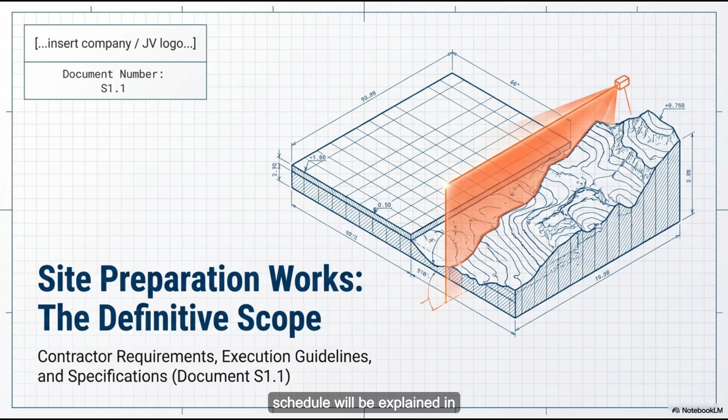You know the scene. You are walking down the street, maybe coffee in hand, and you pass one of those massive chain link fences, completely covered in that green privacy mesh. You peer through a gap in the mesh, and what do you actually see? Usually just a giant, muddy, seemingly empty lot. Maybe a couple of idle bulldozers just sitting in the dirt. And you probably think it is just empty space, waiting for the real work to begin.

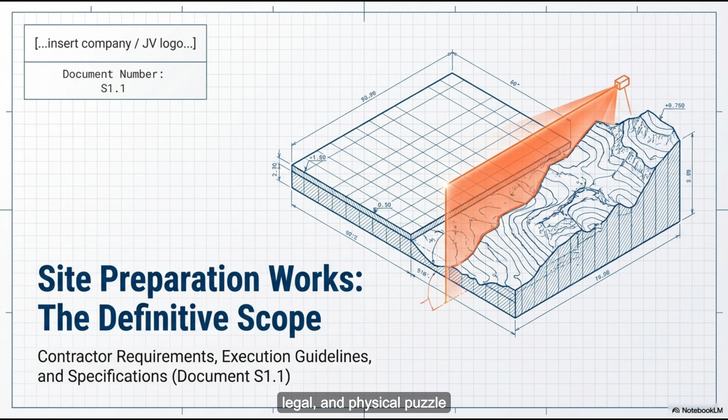Which is what pretty much everyone thinks. But you would be entirely wrong. So wrong, because that muddy lot is actually a highly engineered, legally binding, and mathematically precise blank canvas. It is governed by a ruthless set of rules. Absolutely ruthless. Today, we are unpacking the massive, high-stakes legal and physical puzzle that happens before a single brick is ever laid on a major infrastructure project. It is a massive undertaking.

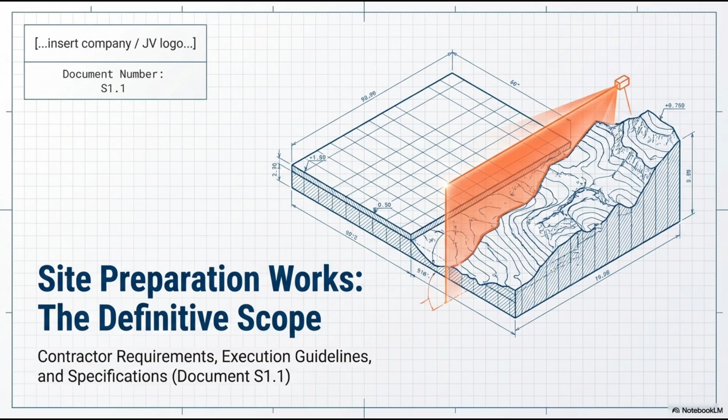We are doing a deep dive into document number S1.1, the Site Preparation Works specification of a FIDIC Red Book construction contract. For anyone who doesn't spend their weekends buried in international construction law, the FIDIC Red Book is basically the global gold standard for complex construction contracts. The ultimate rule book.

It dictates exactly who is responsible for what, and critically, who absorbs the financial blow when things inevitably go wrong.

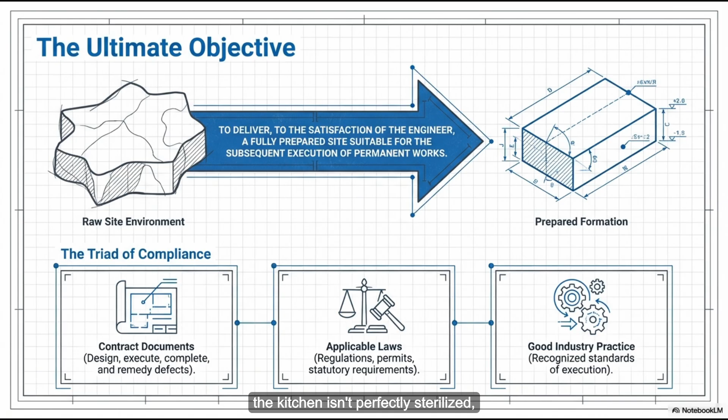To give you a sense of the stakes here, think about prepping for a massive dinner service at a Michelin star restaurant. Because if the kitchen isn't perfectly sterilized, if the ingredients aren't verified down to the gram, and if the prep cooks haven't executed their jobs flawlessly, the actual cooking is going to be a disaster. You cannot execute a culinary masterpiece in a contaminated, disorganized kitchen. The permanent works of the meal rely entirely on the invisible work done hours before the first order is even fired.

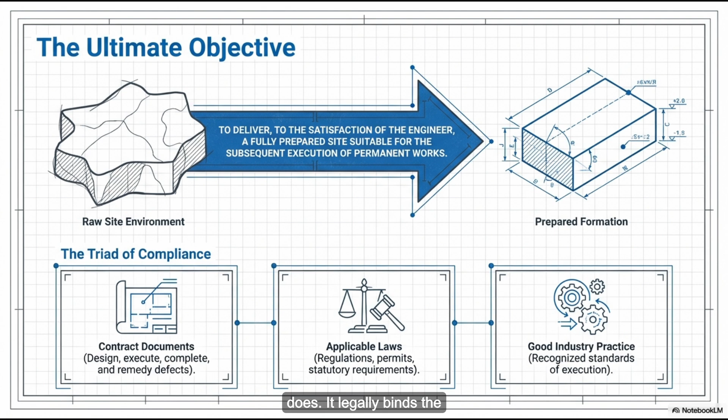That captures the essence of document S1.1 perfectly. The stated objective is to deliver a fully prepared site suitable for the subsequent execution of the permanent works. The engineer acts as the employer's representative, overseeing the administration. But Section 2 of this specification lays down a staggering mandate. It legally binds the contractor to provide all labor, materials, equipment, and temporary works. But it goes so much further than just supplying tools and people.

Because Section 2 contains what I can only really describe as a legal trapdoor, a very expensive trap. It's a catch-all clause. It literally states that any work, services, or items not expressly described in the contract documents, but which are necessary for the completion of the works, must be executed by the contractor without any additional cost to the employer. It is the exact kind of clause that forces project managers to double and triple check their insurance policies. The employer is essentially transferring the dire risk of the unknown directly onto the contractor's shoulders.

It feels like buying an all-inclusive vacation, and right as you're packing your bags, the travel agent casually mentions, oh, by the way, if we forgot to put your return flight on the itinerary, it is your responsibility to book it and pay for it yourself. Enjoy the beach. That is exactly how it feels. So I am trying to picture how a contractor practically prepares for unknown unknowns when they are bidding tens of millions of dollars on a project. How do you price a ghost? Well, you price it by being intensely proactive, and that is the exact behavior this contract is designed to force.

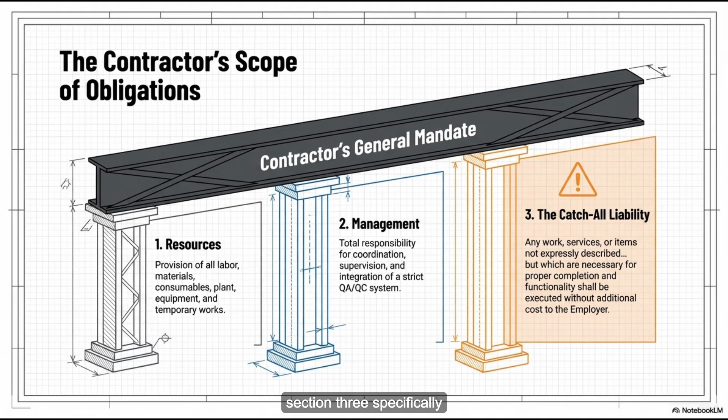The employer's logic is basically, we are paying for your expertise, not just your manual labor. So Section 3 specifically mandates the contractor must scrutinize all documents upon receipt, immediately. They are legally obligated to notify the engineer of any errors, omissions, or ambiguities before they even start up a single bulldozer. They have to rely on what the contract calls recognized good industry practice.

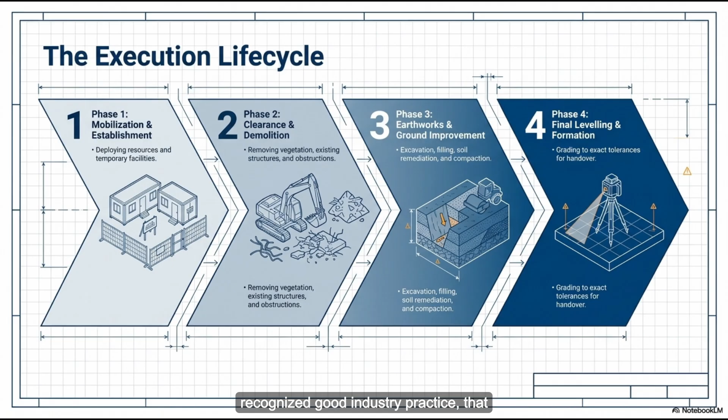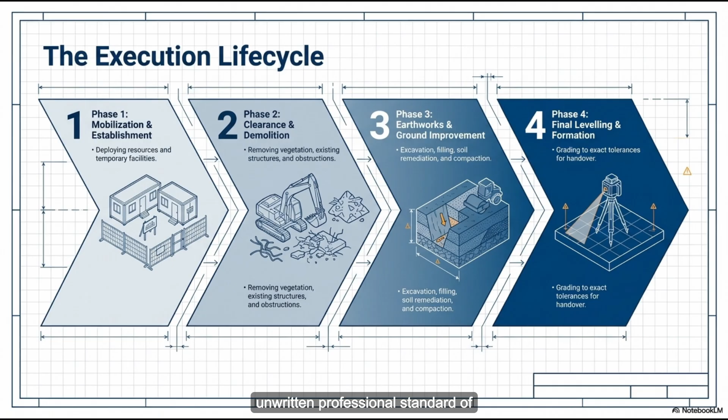So if they are required to use recognized good industry practice, that implies the contract isn't just binding them to the literal words on the page. It's binding them to the entire unwritten professional standard of their field. They can't just act as mindless order takers and say, well, I just built what you drew.

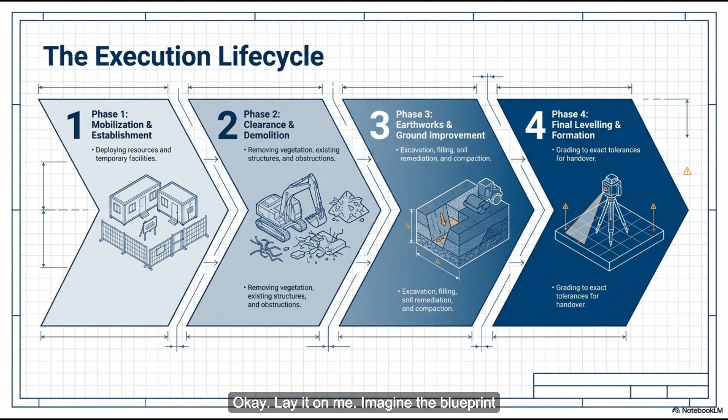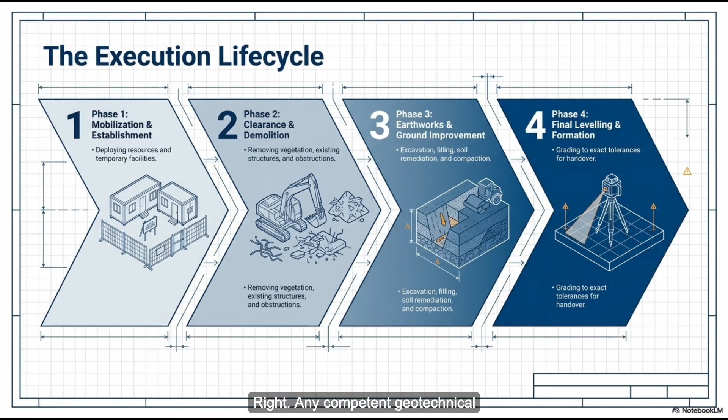Far from it. Let's look at a hypothetical disaster to illustrate that. Imagine the blueprint for the site preparation is missing a crucial retaining wall near a steep incline. Any competent geotechnical engineer looking at that site would know a retaining wall is necessary to prevent a mudslide. So it's obvious to a professional.

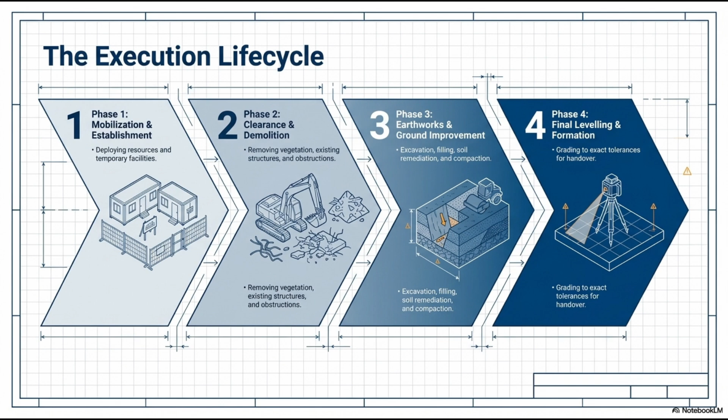Exactly. Now, if the contractor fails to catch that omission during their mandatory review and they just clear the site according to the flawed drawing and a mudslide occurs, the catch-all clause kicks in. The contractor pays for the cleanup, and they pay to build the retaining wall entirely out of their own pocket.

That is just wild. Given that massive financial sword of Damocles hanging over them, the contractor basically cannot afford to trust the existing site environment at all, not even a little bit. They have to take absolute physical control from day one, which explains the sheer scale of Section 4, the mobilization and site clearance.

Mobilization, outlined in Section 4.1, is a monumental logistical hurdle. It isn't just dropping a portable toilet and a trailer on an empty lot, which is what I always pictured, honestly. Most people do, but they actually have to establish a temporary, fully functioning mini-city.

We're talking about negotiating with municipal grids to tap into power and water, setting up high-bandwidth telecommunications, installing specialized sanitation facilities, building temporary access roads that can handle the weight of heavy machinery, and securing a labyrinth of permits just to legally exist on that piece of land. So they are essentially building a temporary infrastructure network just to support the people who are going to build the permanent infrastructure network. That is exactly what it is.

And once they finally have their mini-city up and running, Sections 4.2 and 4.3 get into the physical clearing and demolition - the tearing down part. Ripping up existing vegetation, tearing down old structures, safely capping and disconnecting old, potentially dangerous utilities like live gas mains or high voltage lines. It is highly hazardous work.

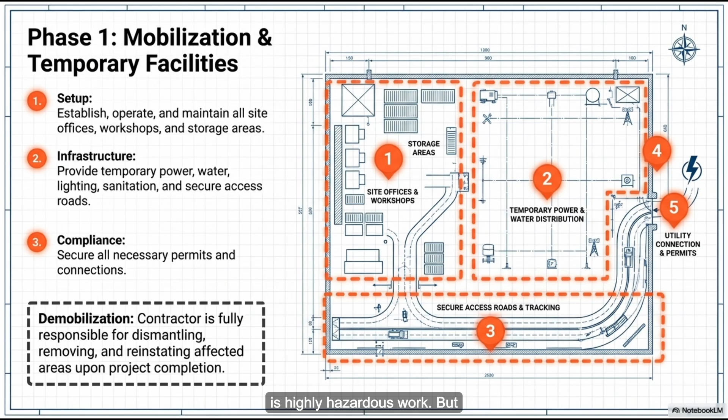But then we hit Section 4.5, which covers ground improvement, and this is where the reality of the dirt itself comes into play. Ground improvement is often the most volatile phase of the entire operation. The contractor is entirely responsible for identifying and excavating unsuitable or contaminated soils.

I have to pause on this because when I read the specifics of Sections 4.5.3 and 4.5.4 regarding environmental protection, I was genuinely surprised. I always assumed that if a crew dug up a pocket of toxic soil, say heavy metals from an old factory, or hydrocarbons from a forgotten gas station, they'd just load it into a lined dump truck, drive it to a specialized hazardous waste landfill, and that was the end of it. Out of sight, out of mind.

Right, but this specification heavily emphasizes treating the soil on site. They can't just truck it out. They actually have to wash or stabilize the dirt right there on the lot. Trucking it out is often the absolute last resort, and understanding why requires looking at the broader environmental calculus.

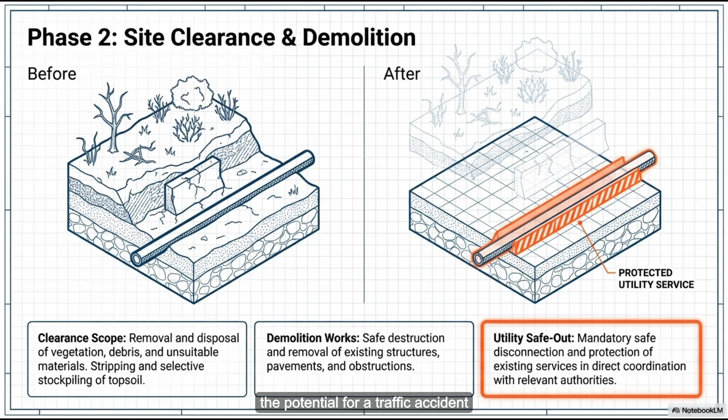Simply loading contaminated soil into a fleet of dump trucks and driving it across a populated city introduces a massive, unacceptable level of risk. You have toxic dust blowing off the truck beds, the potential for a traffic accident spilling hazardous waste into a residential neighborhood or a storm drain. You are taking a localized contamination problem and risking turning it into a regional ecological disaster.

Exactly. So the contract deliberately boxes them in. It demands they solve the chemical problem within the physical boundaries of the site. The contract insists on strict environmental protection measures to prevent cross-contamination. They have to aggressively control dust, mitigate odors, and manage runoff and leachate - leachate being the contaminated water that drains out of the soil when it rains.

Precisely. Section 4.5.4 details the treatment and remediation protocols. This can be in situ, meaning treating the soil deep underground right where it lies, or ex situ, which means excavating it but treating it elsewhere on the exact same site.

The document explicitly mentions soil washing. I was really trying to picture the mechanics of that. How do you wash dirt? Are we talking about giant washing machines for gravel?

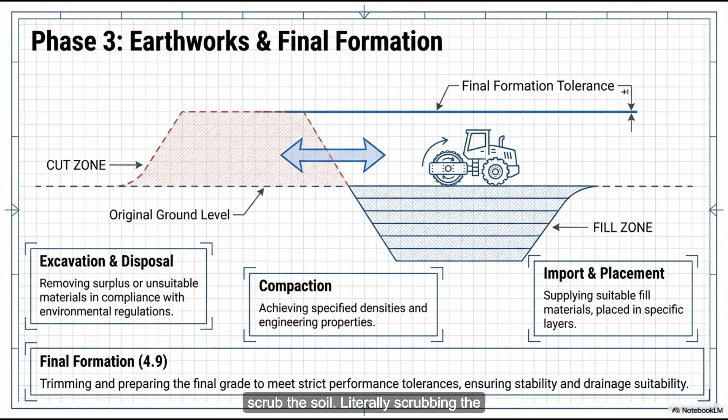Conceptually, yeah. Actually, soil washing is an intense mechanical and chemical process. Picture a massive industrial sorting facility temporarily erected right there on the lot. They feed the contaminated excavated dirt into large trommels, rotating cylindrical screens using high-pressure water jets and chemical surfactants to scrub the soil. Literally scrubbing the dirt. The goal is to separate the fine, heavily contaminated clay and silt particles from the larger, clean gravel and sand.

Oh, because the toxins cling to the finer particles? Exactly. So the clean aggregate can be reused on site, and only the concentrated, highly toxic fine sludge has to be carefully disposed of. That is wild. They are operating a heavy-duty chemical decontamination plant before they have even poured a single ounce of concrete for the foundation. And if washing isn't viable, they might use soil stabilization. How does that work?

This involves deploying massive augers to drill deep into the contaminated earth, injecting and mixing binding agents like cement or specialized polymers directly into the soil. Oh, so it hardens. Right. This chemically locks the toxins into a solid matrix so they cannot physically leach into the groundwater. And strict environmental permits dictate the movement, testing, and handling of every single grain of that soil.

Because, circling back to that catch-all clause we talked about, if they excavate contaminated dirt, fail to cover it properly, and a heavy rainstorm washes toxic runoff into the local municipal water supply, the Environmental Protection Agency shuts the billion-dollar project down immediately. And the contractor is entirely liable for the delay and the fines. The liability is absolute. Which means all this effort, washing soil, stabilizing toxins, moving thousands of tons of dirt, is...

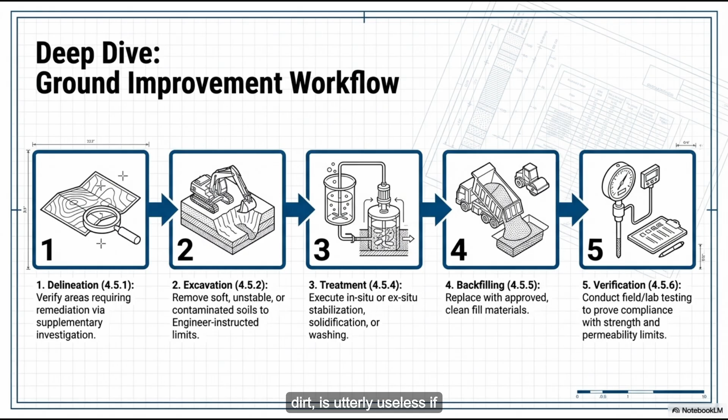Utterly useless if it isn't done to exact geometric specifications. Yeah, it has to be perfect. Which brings us to the invisible mathematical framework that governs this entire operation. Let's look at sections 5 through 7.

Sure. Section 5 covers survey and setting out. This is the critical translation phase, where the two-dimensional blueprint is mapped onto the three-dimensional physical reality of the Earth. The employer, or the engineer, provides the initial reference points and base coordinates. But crucially, the contractor must independently verify all of that survey data before they do anything.

I love this detail because it's yet another trapdoor of strict liability. The contract explicitly states that any errors in setting out the site must be rectified entirely at the contractor's cost. Completely at their cost. It reminds me of a bespoke tailor making you a suit. If the tailor measures your inseam wrong because they used a faulty tape measure that you handed them, but they didn't bother to verify your tape measure against a standard ruler first, they still have to buy the ruined fabric and make you a new suit out of their own pocket.

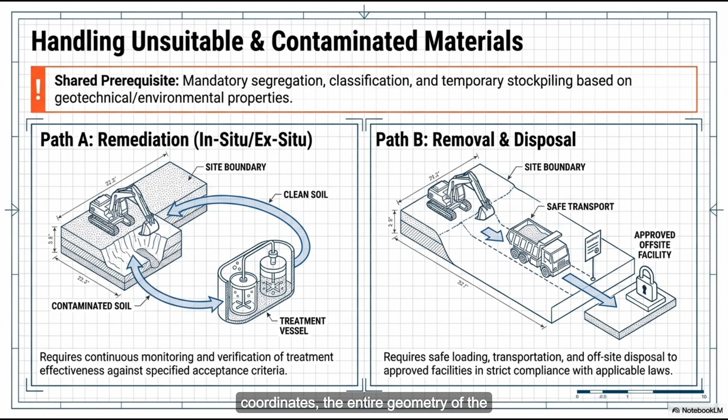Yes. It's wild to think about. It's a brutal reality, but it's the core philosophy of a FIDIC contract. If you build the foundational retaining wall 2 inches to the left because you didn't double-check the employer's coordinates, the entire geometry of the skyscraper going on top of it will be fundamentally compromised. Everything is thrown off. Exactly. The contractor is paid specifically to be the expert verifier.

But mathematical precision is only one pillar of this framework. Section 6 dictates health, safety, security, and environment, the HSE protocols. Oh yes, the contractor has to implement RAMS, which stands for Risk Assessments and Method Statements. I've actually seen RAMS mentioned in engineering circles. It's essentially a highly detailed document that says, here is the inherently dangerous thing we're about to do today, and here is exactly, step by step, how we are going to do it without anyone getting killed or injured.

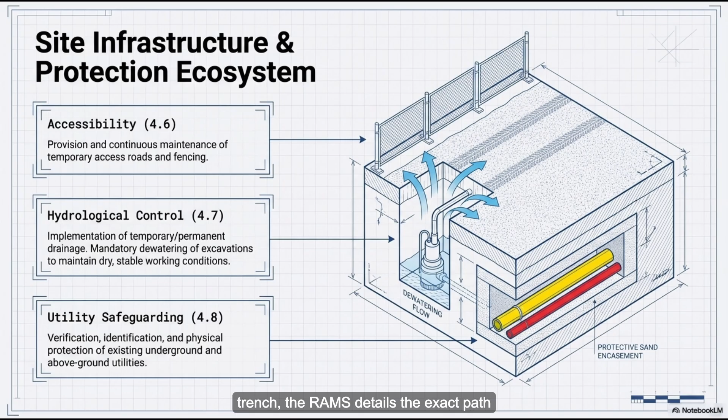Yes, and it is granular to the extreme. A RAMS document isn't just a generic safety poster on the wall saying, wear your hard hat. If they're moving a single piece of heavy machinery near a trench, the RAMS details the exact path of the machine, the spotters required, the soil-bearing capacity near the edge of the trench, and the emergency response procedure if the trench collapses.

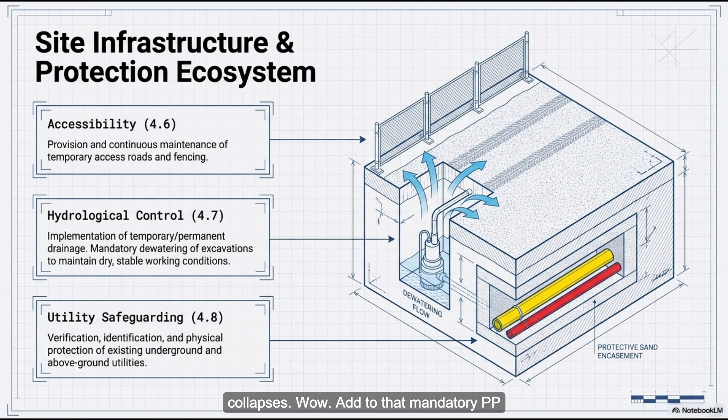Add to that mandatory PPE usage and strict access control with fencing and security gates. And this extreme level of control feeds directly into Section 7, coordination.

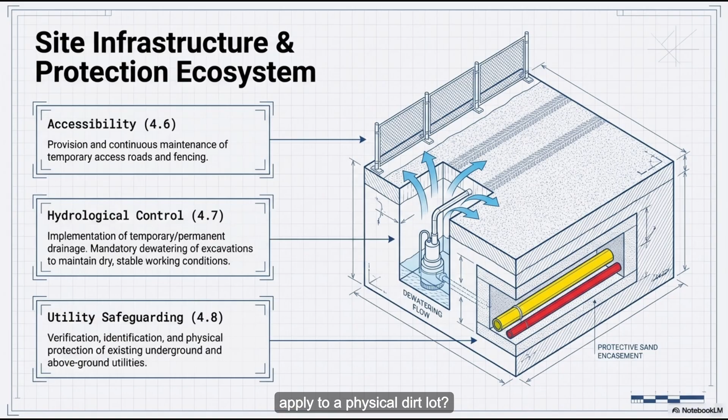The contract refers to this as interface management. In software, that's how two different programs talk to each other. How does that apply to a physical dirt lot? Well, in construction, an interface is the physical or scheduling boundary where different teams, different scopes of work, or different contractors collide. Think of the contractor managing site preparation not as a symphony conductor, which implies a peaceful artistic flow, but rather as an air traffic controller at a one-runway airport where all the planes are made of concrete, steel, and heavy machinery.

If one concrete truck misses its scheduling window, it blocks the steel delivery, which delays the crane operator, which costs tens of thousands of dollars an hour. They have to coordinate with the engineer, the employer, and entirely separate contractors hired for other phases of the project, managing geographical and temporal boundaries to avoid disrupting adjacent works, existing city operations, and third parties, like the general public walking right outside that green privacy mesh.

Exactly. The site must be geographically flawless, chemically neutral, and strictly secure so the next wave of workers can step in seamlessly. So the dirt is clean, the math is perfectly verified, the site is locked down, and the air traffic control of heavy machinery is flowing smoothly.

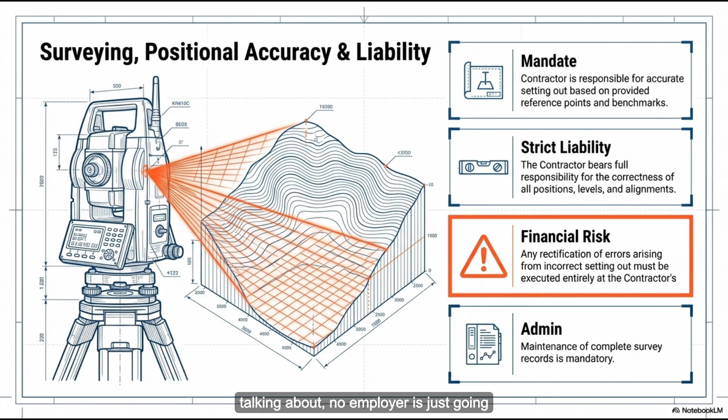Yes. But because of the immense crushing legal liability we've been talking about, no employer is just going to walk onto the lot, nod, and take the contractor's word for it. Absolutely not. They need immutable proof, which introduces what sounds like the most tedious part of the entire specification: Section 8, the completion and handover documentation. The paperwork mountain at this stage is absolutely staggering.

The physical work might be finished, but you have to legally prove you delivered what was promised. The contractor must verify the soil compaction, slope stability, and drainage performance through rigorous field and laboratory testing. They're doing things like Proctor compaction tests, taking physical core samples of the earth to a lab, just to prove the soil density meets the mathematical requirement to bear the weight of a high-rise. Exactly. They aren't just saying we rolled over it a bunch of times with a heavy machine and it looks flat. They are providing certified physics data.

And they have to submit what are called as-built drawings, meaning here is a schematic of what we actually built in the ground, as opposed to what the original blueprint hoped we would build. Because the earth is dynamic, things always shift slightly from the original design. You hit a boulder, you route a pipe slightly differently. The employer needs the final, true map.

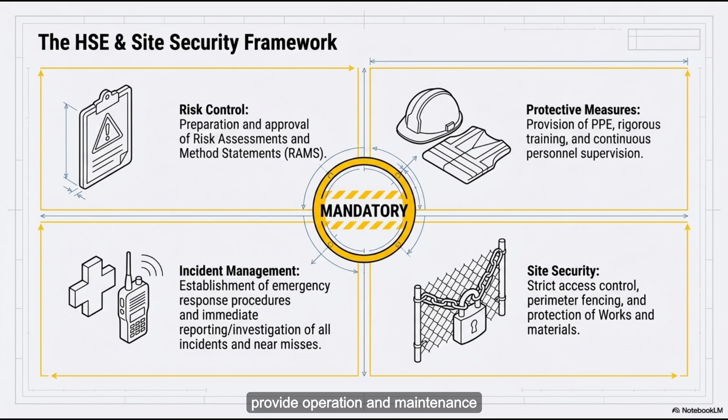That makes total sense. But here is an element of Section 8 that often catches people off guard. The contractor must also provide operation and maintenance manuals, O&M manuals, for any installed systems. Okay, this is where my brain stalled out reading the spec. O&M manuals for site preparation?

Yeah. I completely understand needing an operation manual for a complex HVAC system in a finished hospital or a high-speed elevator bank. But what on earth needs an operation manual in what is, at the end of the day, a highly prepped dirt lot? I get it.

It sounds weird. Yeah, it requires a shift in how you view the site. When we hear site prep, we imagine a dormant, flat patch of land. Right, but a highly prepped site is actually a living, active machine.

It often includes complex temporary or even permanent drainage networks that require specific maintenance to prevent erosion. It might feature deep dewatering pumps running 24 hours a day to keep the natural water table artificially depressed, so the next contractor can pour a deep concrete foundation without it immediately flooding. So if nobody maintains those pumps according to the manual, the pumps fail, the water table rises overnight, and the newly excavated foundation turns into a swamp.

Exactly. Or consider the ground improvement we discussed earlier.

If they used active soil stabilization systems or installed subterranean monitoring wells to track groundwater contamination levels over time, all of those require specific ongoing protocols. Wow, the permanent buildings aren't up yet, but the site is already a functioning engineered system. The employer needs the manual to know how to keep that system from basically collapsing in on itself.

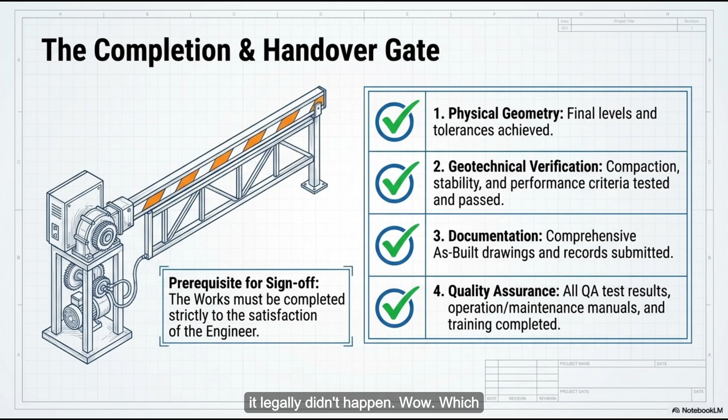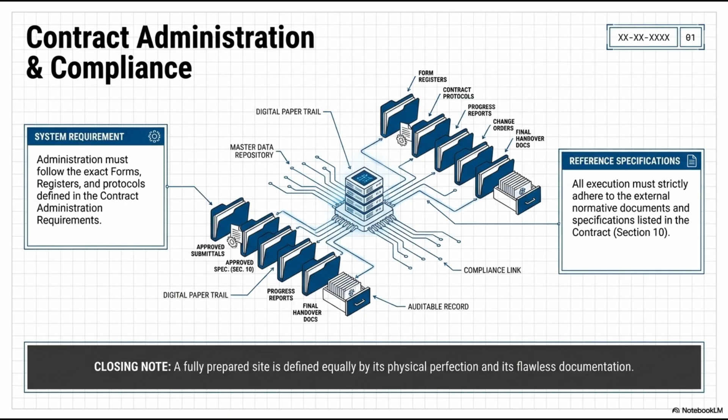Which means the next time you, the listener, are walking down the street holding your coffee and you pass one of those freshly cleared, fenced-in construction sites, do not just see empty land. Far from it. You are looking at a heavily engineered, legally bound, and rigorously verified foundation. You are looking at mathematically perfect coordinates, chemically washed soil, and a space that absolutely guarantees that whatever billion-dollar structure goes up next won't sink into the mud, slide down a hill, or poison the city's groundwater.

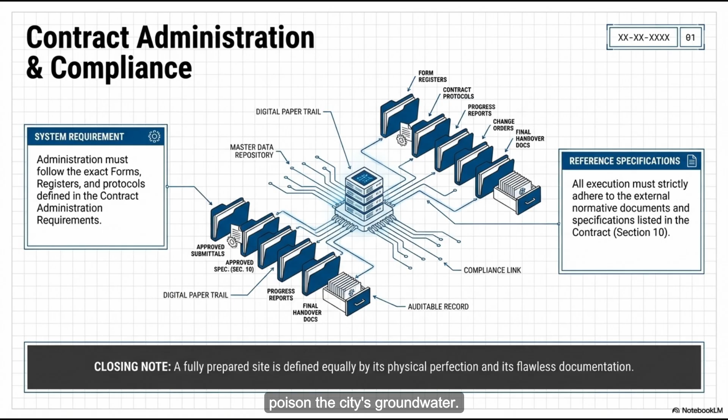It is a triumph of invisible engineering. It is the essential mastery of the earth before the visible mastery of architecture even begins. Archive everything, because if it isn't documented, it didn't happen.

But you know, looking at how intense that human documentation process is actually makes me wonder about the future of this entire FIDIC framework. How do you mean? Well, we have spent this whole time talking about immense human liability, the contractor taking all the risk, verifying the surveys by hand, taking the fall for the catch-all clause, but we are rapidly entering an era where AI and autonomous systems are taking over these exact verification tasks.

Yes, the industry is already shifting. We have autonomous drones flying the site daily, using advanced photogrammetry to build real-time topographical maps, and AI models analyzing ground-penetrating radar to flag subterranean contamination.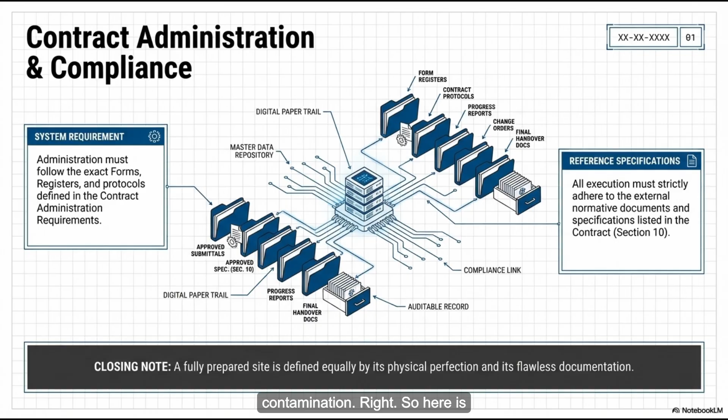So here is the provocative thought to leave you with. As these autonomous tools become recognized good industry practice, what happens when the algorithm is wrong? That is a million-dollar question. If an AI model analyzes the radar and fails to flag a massive hidden pocket of toxic soil, and the contractor builds over it,

who bears the millions of dollars in remediation costs under that ruthless catch-all clause? It's a huge gray area. Does the construction contractor still eat the cost because they relied on the tool? Or does the liability finally shift away from the dirt and onto the software developer who trained the AI model?

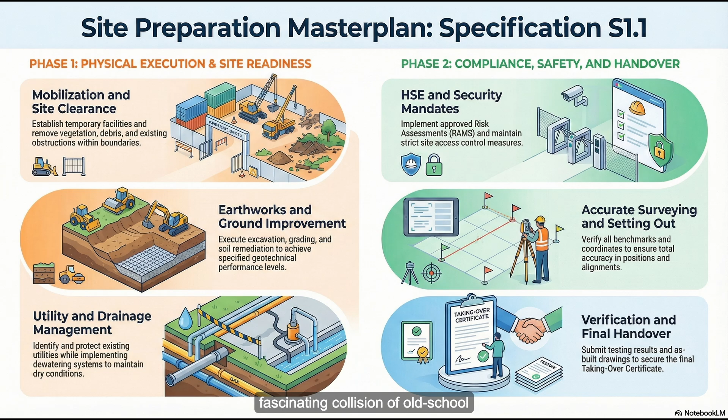It is a profound legal battlefront that the infrastructure world is just beginning to confront. When the human expertise demanded by a traditional FIDIC contract is replaced by an algorithmic output, those centuries-old definitions of liability are going to be tested in unprecedented and incredibly expensive ways. It is going to be a fascinating collision of old-school contract law and cutting-edge tech.

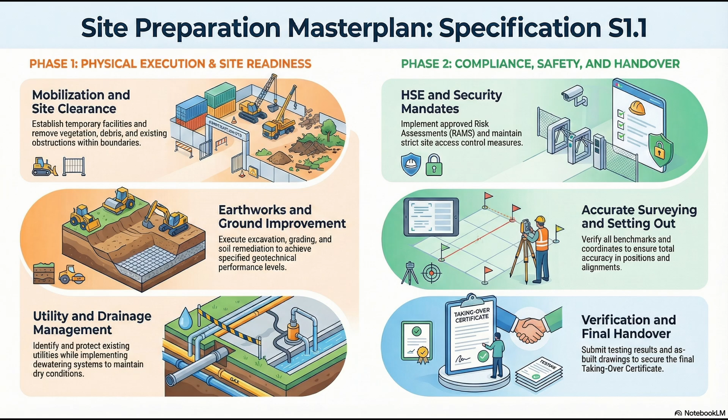Definitely something to chew on the next time you see a drone hovering quietly over an empty, muddy lot. Absolutely. Remember, the kitchen has to be spotless before the cooking begins. Keep questioning the complex layers hidden behind the everyday world around you, and we will see you on the next deep dive.